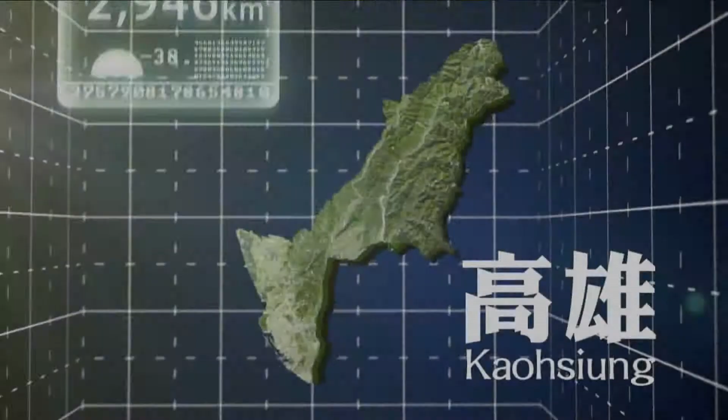Kaohsiung City in southern Taiwan has natural harbors and wide hinterlands. It has recently become the most developing international seaport and commercial metropolis in Taiwan. If the domestic sewage from high economic growth and heavy population is not properly treated, the living quality will be worsened. Therefore, the functions of city sewer system and sewage treatment plants become quite important.

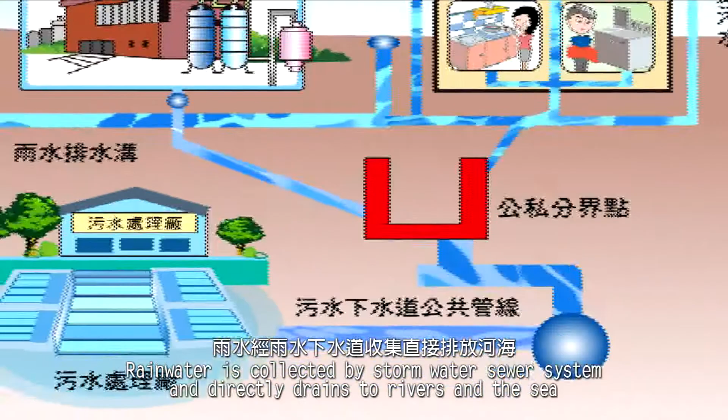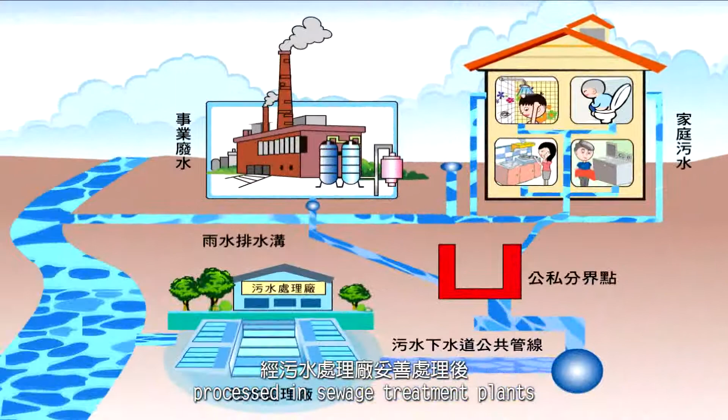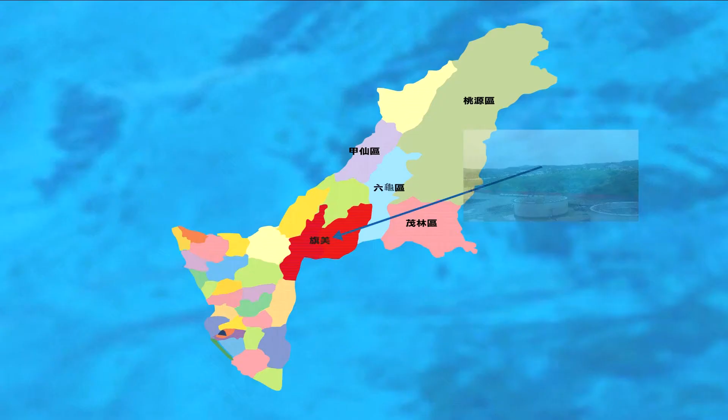The sewer system in Kaohsiung City uses stormwater and sewage separation system. Rainwater is collected by stormwater sewer system and directly drains to rivers and the sea. Domestic and industrial sewage is collected by underground sewage sewer system, processed in sewage treatment plants, and drains in surface water body. Based on current plan, there are 10 sewage districts from north to the south of Kaohsiung City. Each district has its own sewage collection system and treatment plant.

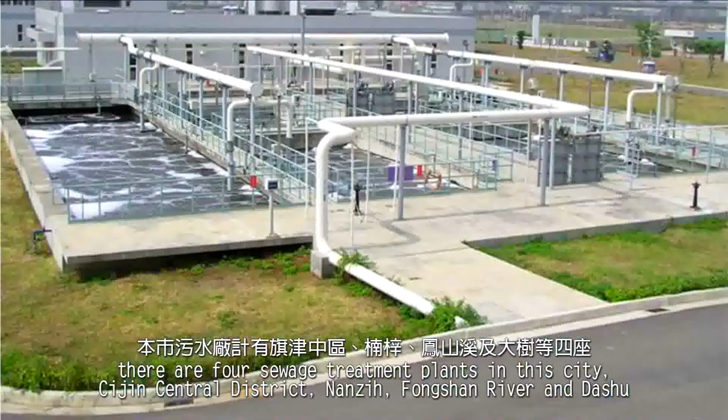Till year 2013, there are 4 sewage treatment plants in this city: Cijin Central District, Nanzih, Fongshan River, and Dashu. 2 plants are being built, Qimei and Linhai sewage treatment plants. The sewage district in Kaohsiung City is separated into east and west collection systems. West system collects city central sewage into Chang'an Road main pipe. East system collects suburb sewage and leads to Kaishan Road main pipe. The east and west systems meet in a convergence station in Chang'an Triangle Park. Then it passes Quojian Road main pipe, crosses Kaohsiung Port District, and flows to Central District Sewage Treatment Plant.

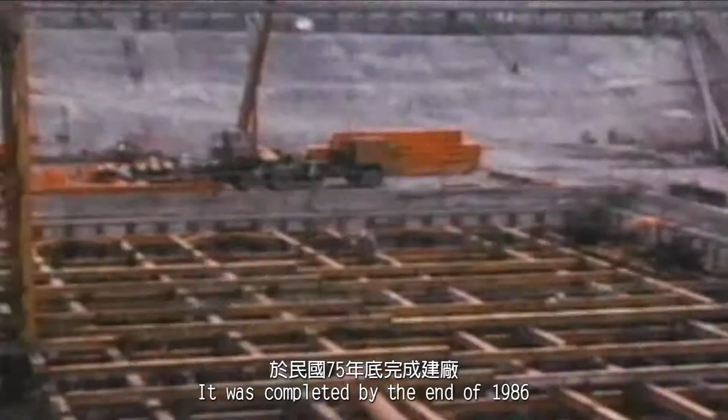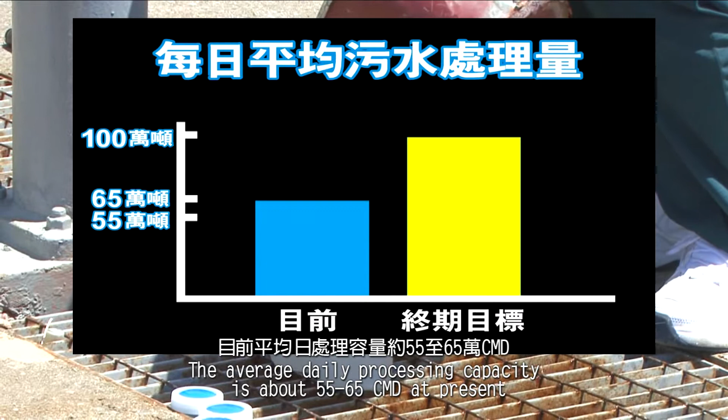Central District Sewage Treatment Plant is located in Chongzhou, Cijin District. The plant measures 900 by 140 meters. It was completed by the end of 1986 and started to operate on 24th January 1987. The average daily processing capacity is about 550,000 to 650,000 CMD at present. Primary treatment is adopted as the sewage treatment method, and effluent drains to the sea from outlet pipe. The whole process separates into 2 parts, sewage and sludge.

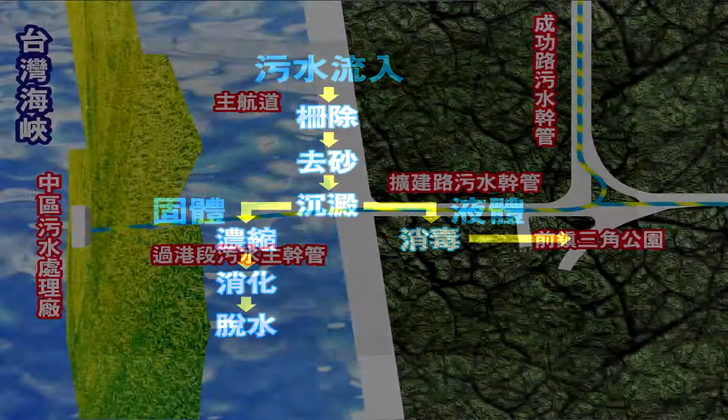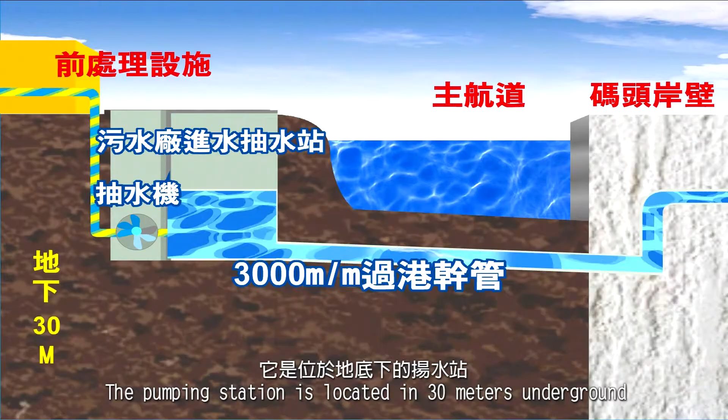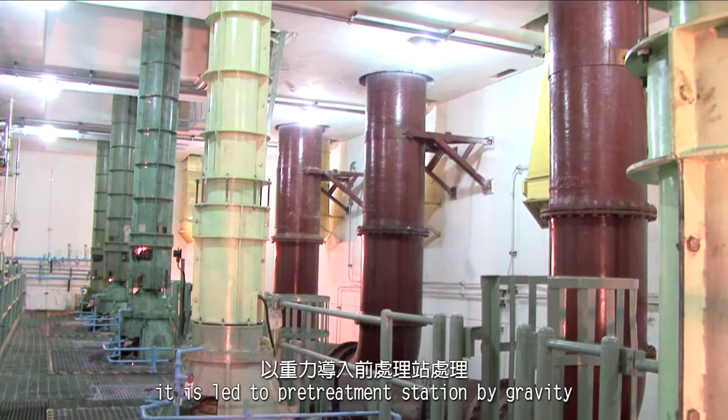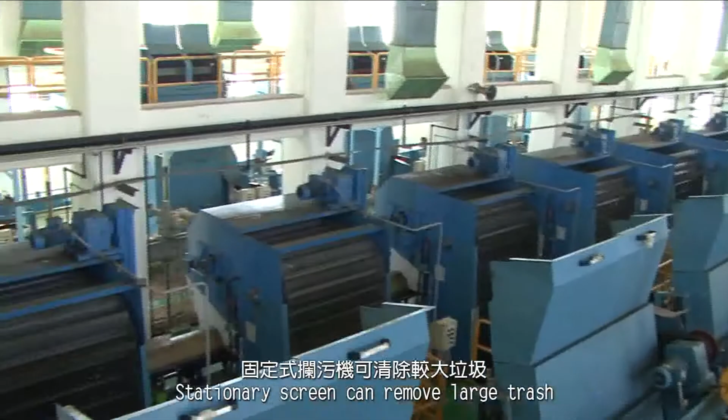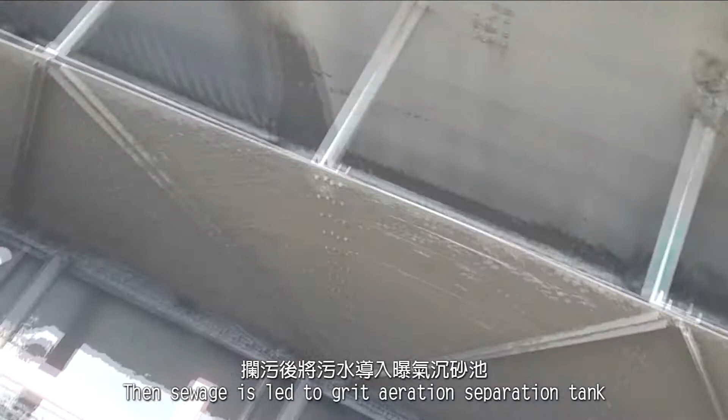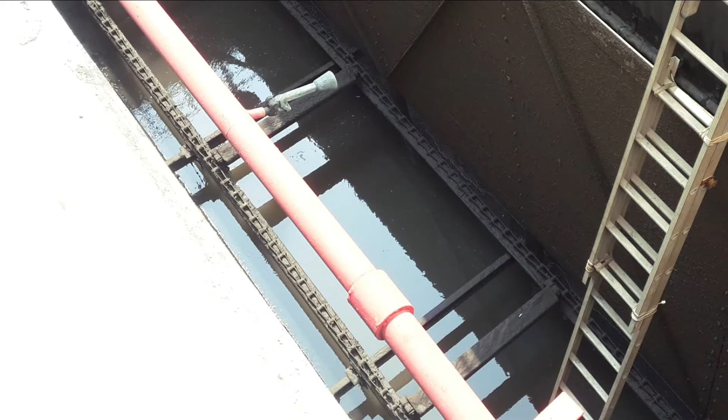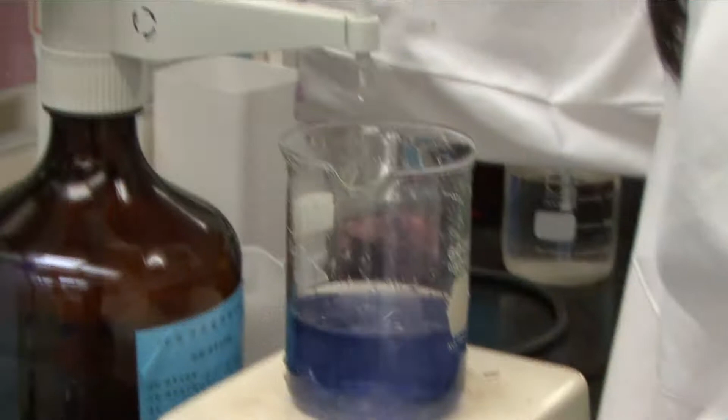Then sewage is led to grit aeration separation tank, by stirring air into sewage to separate grit. The settled grit is scraped by grit scraper at the bottom and disposed. After that, sewage is led to primary settling tank by gravity. The whole primary settling tank has 30 water tanks. They are symmetrically and closely laid out. That was laid out in order to reduce air pollution. Here some invisible suspended particulates settle down by settlement principle, to remove BOD and SS from sewage.

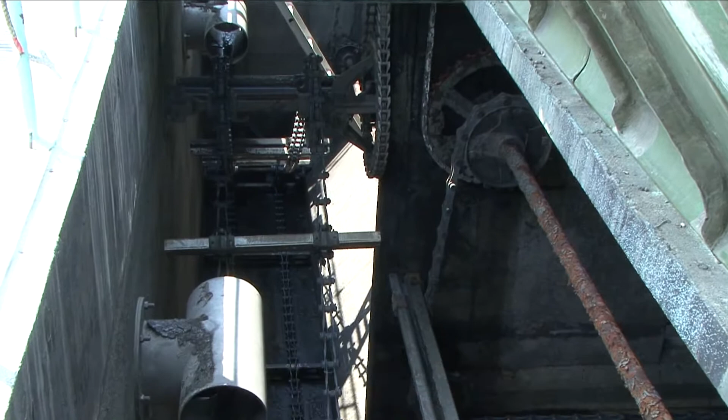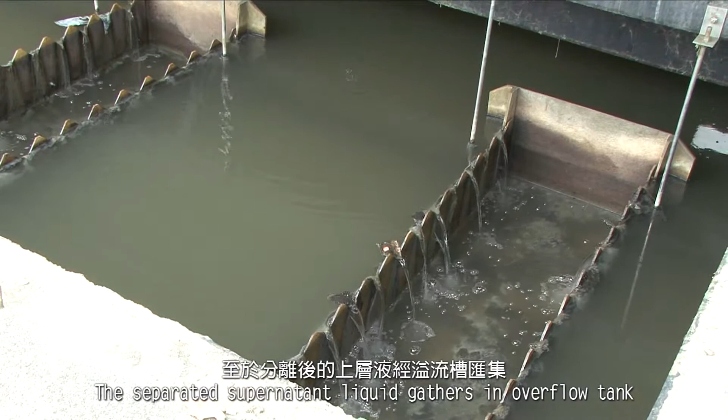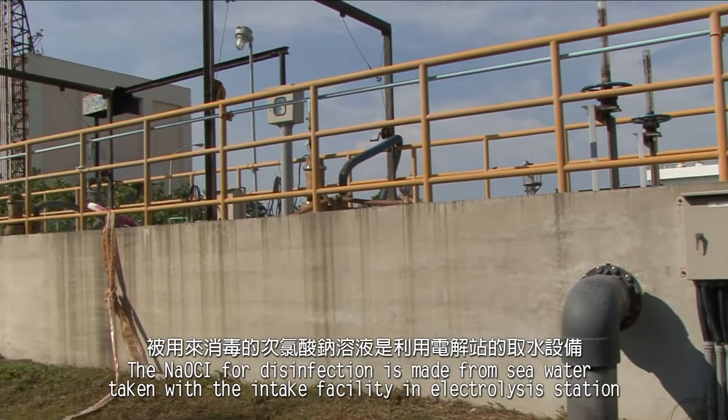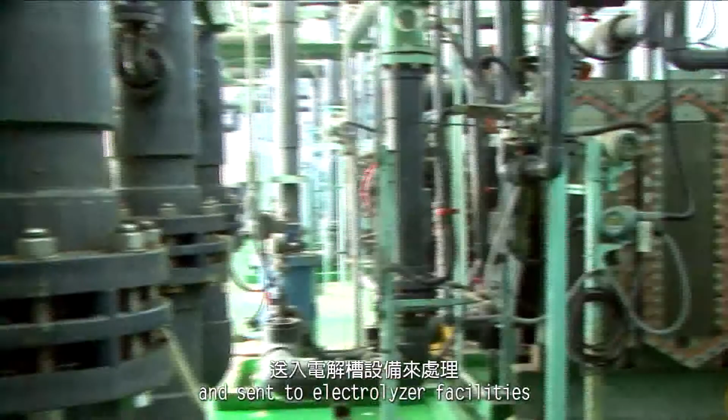After the separated sludge from settlement is collected by iron scraper and ground by grinding machine, it is conveyed to sludge thickener by sludge pressurizing pump. The separated supernatant liquid gathers in overflow tank. It is led to disinfection pool with gravity method and disinfected. The NaOCl for disinfection is made from seawater, taken with the intake facility in the electrolysis station. Seawater is first grit settled, pressurized with water pump, and sent to electrolyzer facilities. The channels in disinfection pool are designed in a roundabout way to increase contact time and achieve effective disinfection.

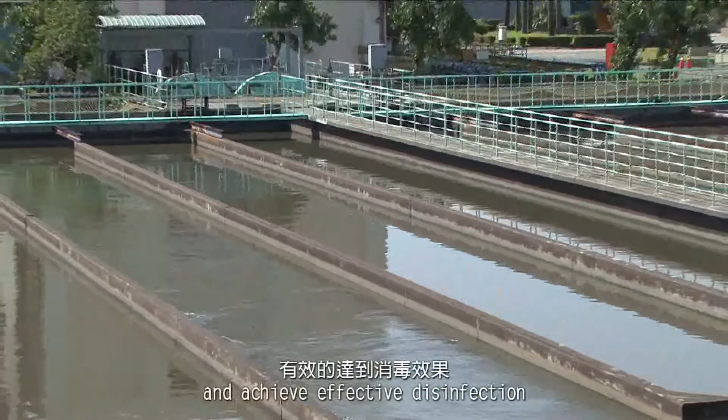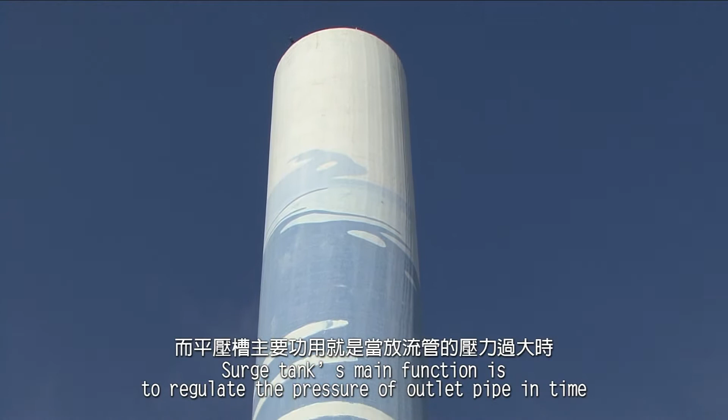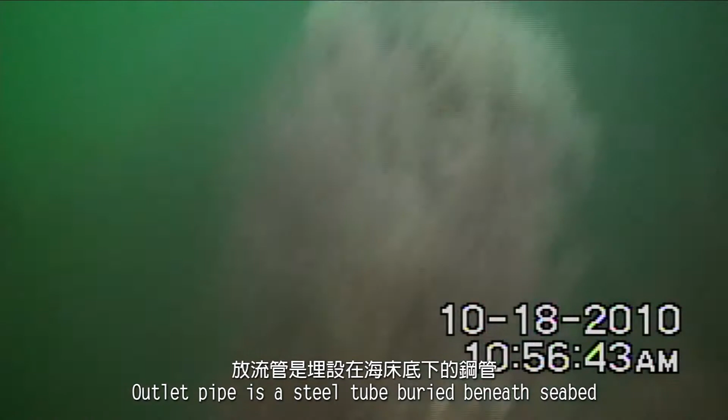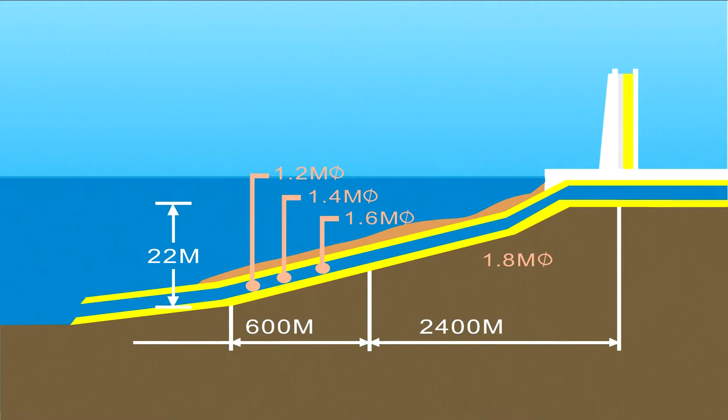On the other hand, the treated effluent is led to drainage pumping station by gravity. After the pressurization of drainage pump sets and regulation of surge tank, it drains and diffuses to the sea from outlet pipe. Surge tank's main function is to regulate the pressure of outlet pipe in time, when the pressure of outlet pipe is too high. Outlet pipe is a steel tube buried beneath seabed. The entire pipeline has cathodic protection in order to extend its lifespan. Near the outlet pipes, 5 permanent warning buoys are also set up to warn the surrounding water areas.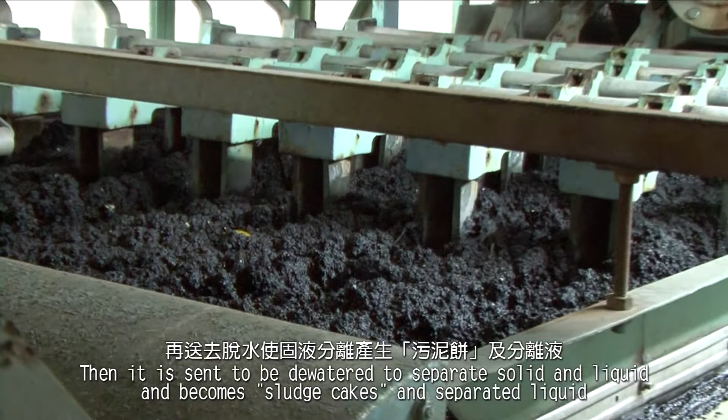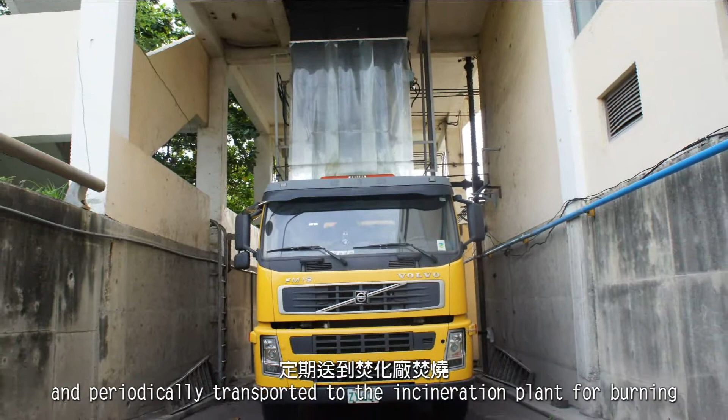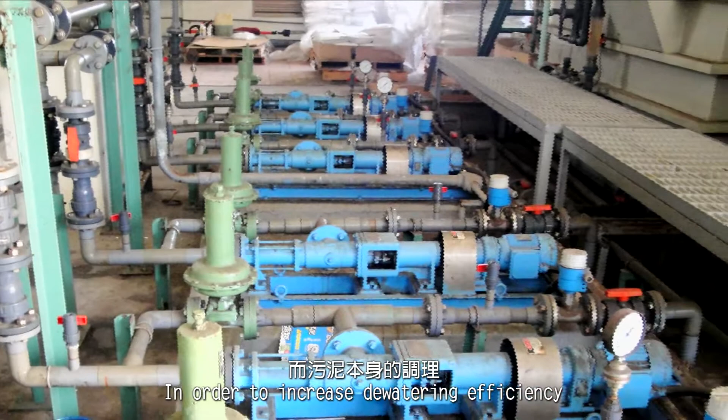Next part is sludge. After being collected and pumped to thickener, sludge is compacted and concentrated. Then it is sent to be dewatered to separate solid and liquid and become sludge cakes and separated liquid. Separated liquid is collected and sent back to sewage treatment system. Sludge cakes are sent to a sludge holding tank by screw conveyor at the bottom and periodically transported to the incineration plant for burning. The dewatering machine uses belt filtering method in this plant in order to increase dewatering efficiency. Polymer is added in the sludge for adjustment.

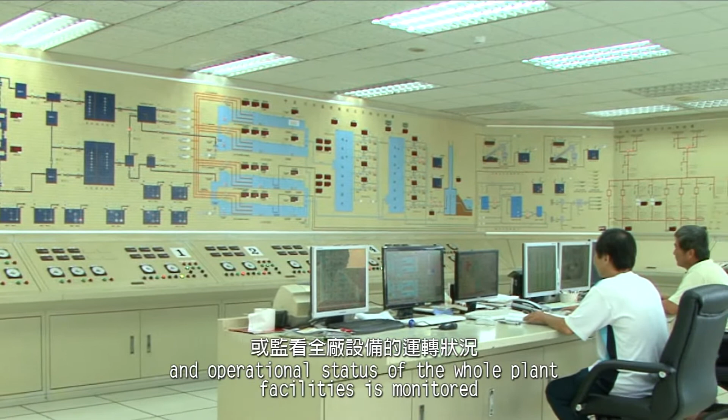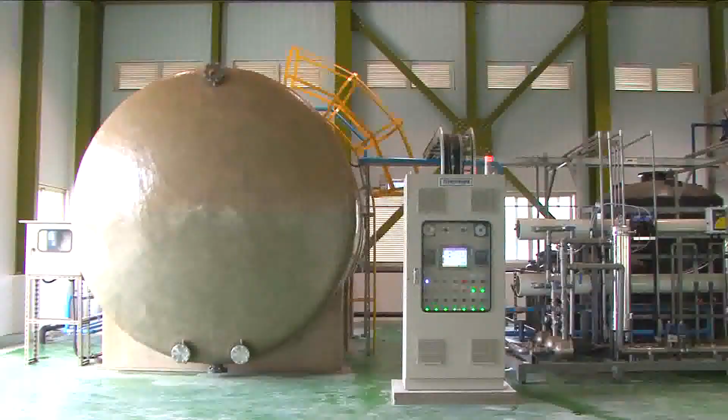The sewage treatment plant needs a control hub, which is Central Monitoring System (CMS). Real-time information can always be obtained, and operational status of the whole plant facilities is monitored. In order to achieve overall control, this plant has dual-loop power supply systems and emergency generators to ensure operation without blackouts. Because of increasing difficulty of water resources development, this plant uses membrane bioreactor (MBR) and reverse osmosis systems (RO) to recycle and reuse water resources.

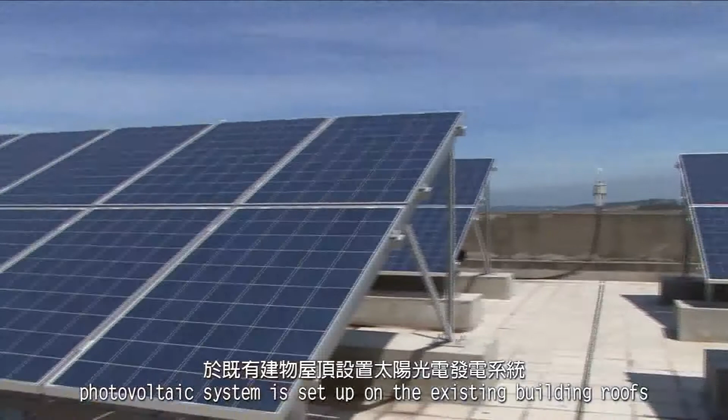We take energy saving, emission reduction, and environment sustainable development as the premise, using adequate sunlight and open terrain characteristics in Qijin area. Photovoltaic system is set up on the existing building roofs to achieve green power efficiency. At present, the capacity of photovoltaic system is about 58 kilowatt.

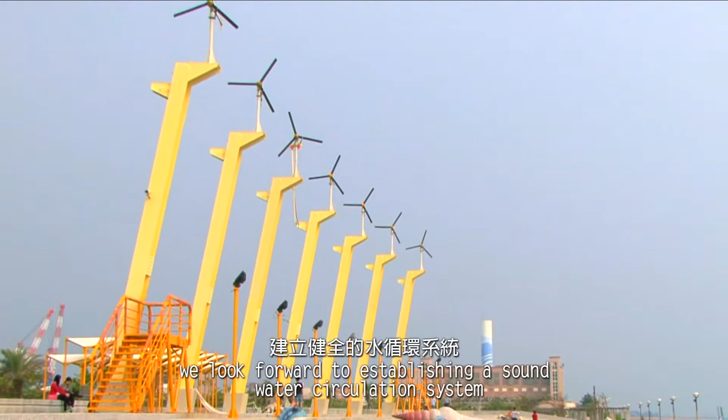Water is the precious resource of the earth. Through sewage sewer treatment, we look forward to establishing a sound water circulation system to make us and future generations able to enjoy clean water resource. We shall work together to improve our living environmental hygiene and create a comfortable modern living space.